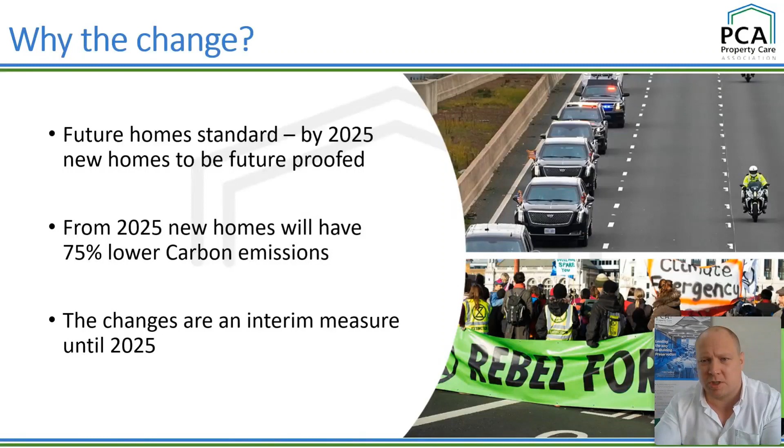So for two reasons, as I see it. One, if we were just going to go straight to 75% lower carbon emissions, it would come as a massive shock. So we need a bit of a transition period there. But equally, we can't just wait and expect people to do it in 3 years. There needs to be this easing in, and this is what we've got now. So that is one of the drivers, and you'll see that when we start looking at the changes, with regards to climate change and the changes to our building stock. So that is one of the drivers for the changes to Approved Document F.

Now, personally, I think there's been a greater reason for the change to ADF, Approved Document F. I last did a webinar a year ago on ventilation, and we looked at a study commissioned by the then Ministry of Housing, Communities and Local Government, now the Department for Levelling Up. They looked at 80 new build properties across a number of sites. And out of those 80, only 3 complied with the building regs, which is shocking. They're the minimum standards. And if we can't get it right in new builds, what hope do we have for existing builds? Now, this was sent to me as a solution for getting around ventilation in an existing build.

So what we've got there is a passive vent install, and just to show, there's the outside as well. This was a ventilation solution that was installed that someone has sent to me. You will notice that they've done that. Obviously, it's a clear bodge, and this is what the problem with ventilation is.

People are getting away with shocking standards. We saw that with the AECOM study, and we're seeing people doing it inappropriately now. They've still got the trickle vent shut, but we'll go into that a bit later. So the problem is Approved Document F unfortunately isn't being followed. That shouldn't happen.

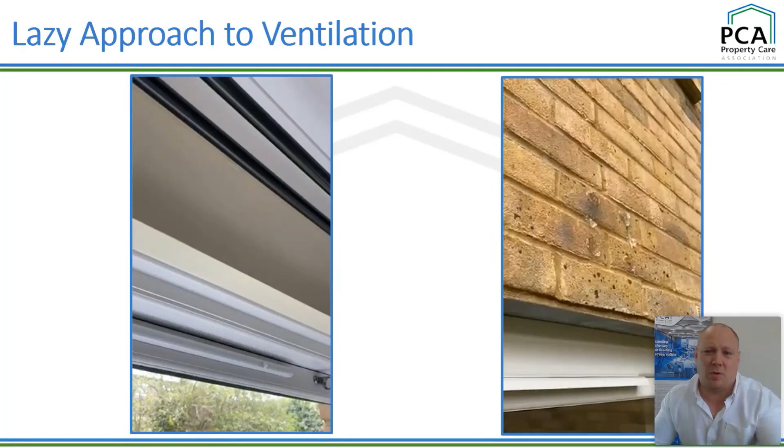Hopefully the tide is turning now when it comes to public perception for the requirement for ventilation. We've got the social landlords bill, which was recently discussed in Parliament, so we're hoping that will make a change. Pre-lockdown, we had the Fitness for Habitation Act, so hopefully the tide is starting to turn, and that sort of thing is no longer going to be acceptable.

Now, for those that aren't familiar, the Property Care Association set up a Residential Ventilation Group, the RVG, which was to try and cast the spotlight on residential ventilation and improve standards when it comes to ventilation in existing buildings. Now, we have been quite vocal and were very much trying to get a revision to the building regs.

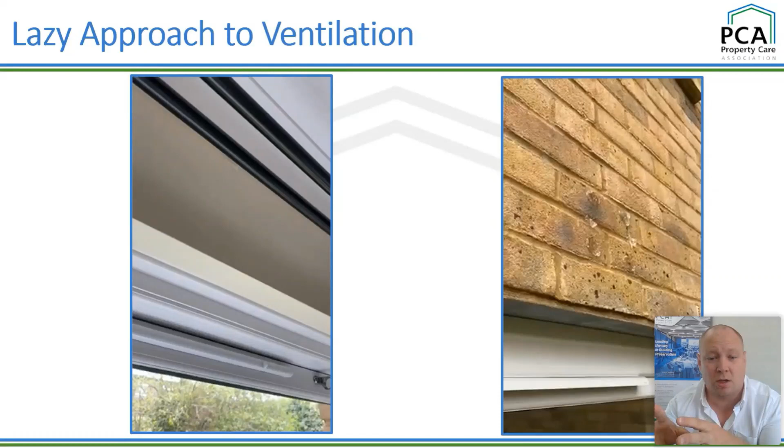What we wanted to see was much like you've got in Part L, where you have an L1A and an L1B. L1A looks at new builds, L1B looks at existing builds. We wanted to see something like that replicated in ventilation. So that was what we were lobbying for. And now there are two documents. However, they're not quite the split that we would have wanted.

So we now have Volume 1 and Volume 2. Approved Document F Volume 1 looks at dwellings. Volume 2 looks at buildings other than dwellings. A caveat, I guess: I am only going to be looking at the English version of the regs.

The Welsh version has recently come out, Paul. I know you're listening, but we're just going to be looking at the English version. The Welsh version has also just been amended. They are very, very similar. There are some slight differences, and actually, to some degree, I think the Welsh regs are clearer. But we will touch on that a bit later.

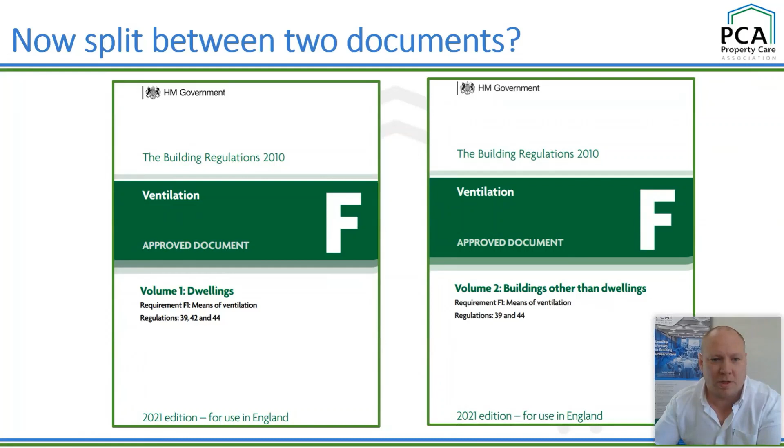So I guess the big question, if we've got two regs and the difference is dwellings and non-dwellings, is what is a dwelling? A dwelling is a self-contained unit designed to accommodate a single household. So essentially a terraced house, a semi-detached house, a typical house, a flat.

What it doesn't include is houses in multiple occupation, so HMOs, where you might share a single kitchen. That would then come into buildings other than dwellings. So halls of residence, hotels, hostels all fall into buildings other than dwellings. If it's designed to accommodate a single household, then it's dwellings. That's what we're going to be looking at today, Volume 1.

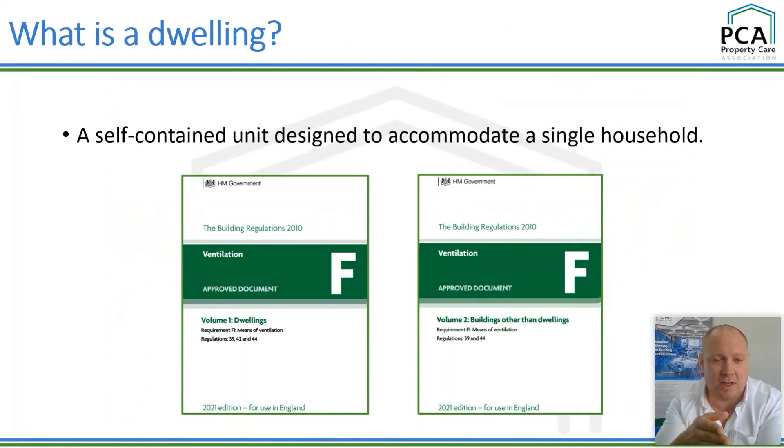The other big change to the document, for those that are familiar with the previous version: we had the Domestic Ventilation Compliance Guide. That has now been scrapped. Well, it hasn't been scrapped, it's been brought into Approved Document F, so it is all in one place. The Domestic Ventilation Compliance Guide was very much around commissioning and provided all the information, commissioning sheets, things like that. Rather than having that as a separate document, it has now been incorporated into ADF.

I personally think that is the right move. Whilst there was a lot of good information in the Domestic Ventilation Compliance Guide, having it as a separate document I always saw as a barrier to compliance, because if you're detaching that information, people are less likely to go find it and less likely to follow it.

So having that in one place is, in my mind, absolutely the right thing to do, provided you get all the information across from the previous version. The other big goal that they were looking to do with this was simplification. Now, if you'd read the old ADF, it was quite impenetrable. It wasn't necessarily easy to read. And I think that was the case for a lot of the building regs, not just ADF.

But ultimately, this is where I always thought that building regs fell down: a lot of them were written and aimed at almost academic level, which is fine, but actually it's the guy on site that needs to understand it, because he's the one that needs to understand what he's doing. They have tried to simplify this document, and as far as readability goes, I think they have done a pretty good job with that.

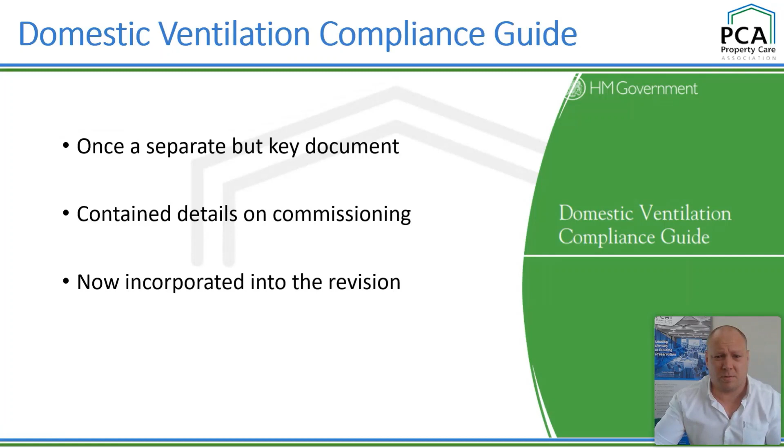So if you look at it, it does flow a lot better. There are some areas which I think are perhaps contradictory or not quite clear and open to a bit of interpretation, and we're going to look through those as we go through this today. But as far as simplification goes, to some degree, I think they get a tick for that. So good on them. So what are the requirements of Approved Document F?

What is the goal? If you were familiar with the old version, essentially these have not changed. There are two requirements. There shall be adequate means of ventilation provided for people in the building, which absolutely there should. Why do you need ventilation? There is obviously humidity. You need to be able to control humidity to prevent build up of moisture, to prevent mold growth, that sort of stuff.

But there's more to it than that. It's there to control VOCs, pollutants, that sort of stuff. We need it to regulate temperature. We need it for fuel burning appliances. We need it to breathe. So ventilation is not solely about moisture. It's probably the bit that we all recognize, but there is much more to it, and it's worth bearing that in mind.

The second part of the requirements of Approved Document F is that fixed systems for mechanical ventilation and any associated controls must be commissioned by testing and adjusting to secure the necessary objectives. So you must provide adequate ventilation, and then you must test and commission to prove that you've got there, which is simple enough. As far as that bit goes, whilst it was broken because it wasn't being followed, I think it is the right thing to have done.

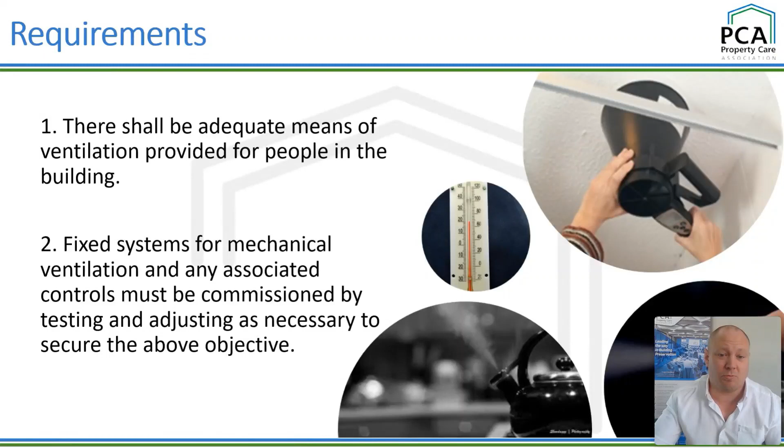So the objectives as far as ADF goes remain the same. But when is it applicable? You do not need to comply with ADF if it is a space where people do not normally go, is used solely for storage, or is a garage. For those that are keen-eyed amongst you, that is the stairwell from 4 Privet Drive, which is Harry Potter's address from the Muggle world, and that is his bedroom under the stairs.

So just for a bit of fun, not a quiz, perhaps in the chat: do you think Harry Potter's bedroom under the stairs would need to comply with building regs? Is it a place where people would normally go? Would it normally be used for storage? In this case, you've obviously got someone living there. So would you need to comply with Approved Document F? Just for fun, people's thoughts in the comments. Would you need to comply as far as ADF goes for his bedroom?

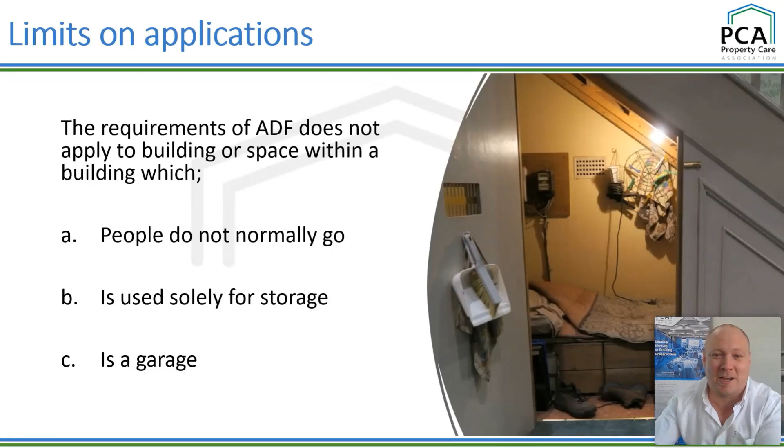So they're the areas where you don't need to comply. And then we have these exemptions, and the exemptions are areas where you may not fully need to comply with the building regs. The exemptions are historic and traditional buildings, emergency repairs, minor works, and live/work units.

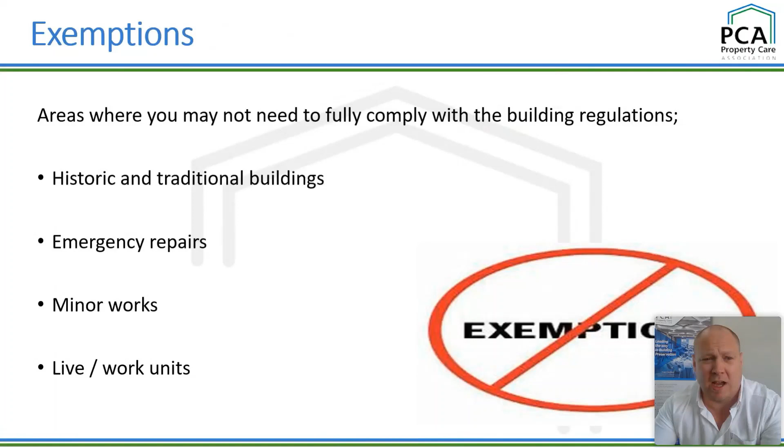I find one of these a bit uncomfortable, and we'll look at that in more detail, which is the historic exemptions and traditional buildings, partly because the term traditional buildings I find bizarre. You know, I live in a 1970s house, built as you'd expect, cavity walls, tiled roof. It's as traditional a build as you could possibly get. So traditional, I think, is far too wide a sweeping term.

But the historic exemptions, it goes on and provides a bit more detail. Historic buildings with a vapor permeable construction that both absorbs moisture and allows moisture to evaporate. And it gives you some examples, including wattle and daub, cob, stone, and constructions using lime render and mortar. You've got to bear in mind, probably the vast majority of the something like 8 million solid wall homes in the UK are probably built using a lime render. And arguably, these are some of the properties that might have the poorest provision for ventilation. So to my mind, it's a bit of a loophole.

And equally, we've already established that ventilation isn't just about control of moisture. It's about so much more. It's about the control of pollutants. It's about control of temperature. And you're not going to get that. So the indoor air quality in these buildings, that ultimately are probably going to be the ones that need bringing up the most if we're going to hit our carbon neutral goal, are probably going to be the ones that suffer the most, because there's this little loophole. You don't need to fully comply.

What does that mean? And it does say as far as reasonably practicable, and that's where they think that they've sort of covered themselves. But to my mind, I think it's a little bit of a loophole. I don't think that a bit of lime render really is a substitute for proper ventilation in my mind.

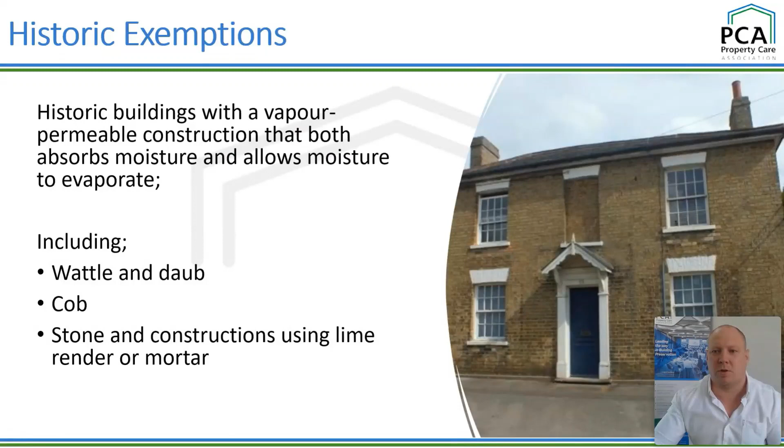Existing buildings. So this is where our biggest area of concern with the previous version lay. It wasn't particularly clear when you needed to comply with the building regs with existing buildings, and this has been very much addressed in this version of the building regs. So another big tick, actually.

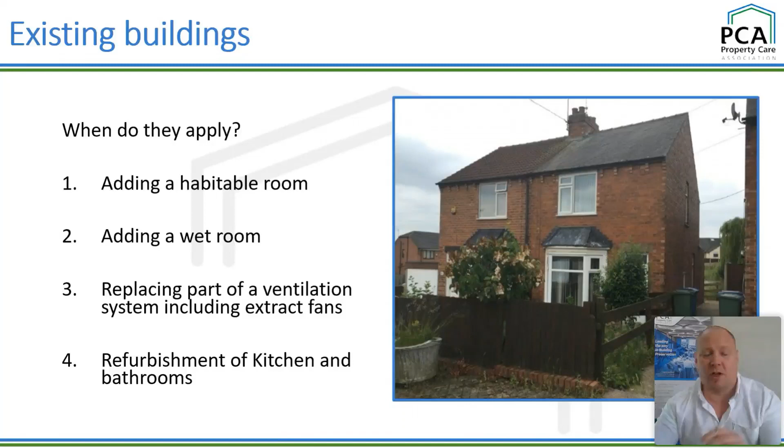When do they apply? They apply when adding a habitable room, when adding a wet room, replacing part of a ventilation system, including extract fans. So if you're replacing a fan, you then need to comply with the building regs, even if it's just part. So any part of the ventilation system, you need to comply. Refurbishment of kitchens and bathrooms. So if you're doing those, then you need to comply with the building regs.

You also need to comply when undertaking works that may impact the ventilation within that building. And then it gives two examples for that: either replacing windows and doors or doing energy efficiency works. As I mentioned in, I think, the second slide, there are going to be huge wholesale changes coming to the building stock if we are going to get to our carbon neutral goals.

So there is going to be a huge amount of retrofit insulation happening to our existing buildings. And a large part of this document is about anticipating those changes. So what it says is that ventilation should either meet Approved Document F when you're doing these works, or it should not be made worse. And how do you establish whether you are going to meet that or you're not making it worse? Well, they provide you a little table.

Mr. Dawson, if you're listening, that's one of your pictures. Thank you very much. You know, the disasters of retrofit, particularly external wall.

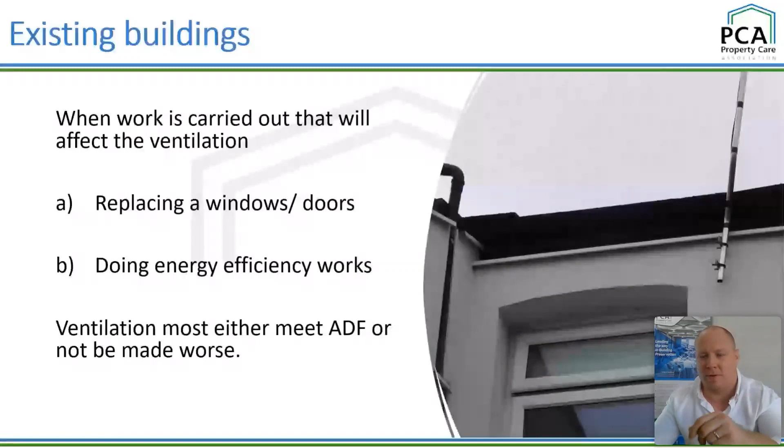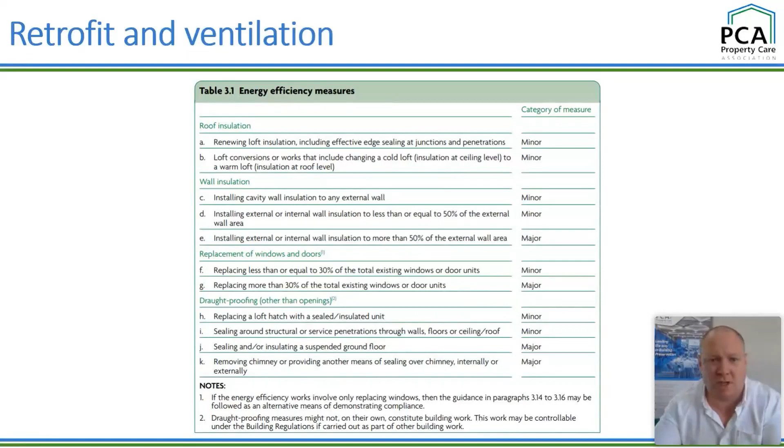So they give you this table, and essentially it's much like a driving test, where you get a list of minors and a list of majors. For instance, renewing loft insulation is a minor. Replacing less than 30% of your doors and windows, a minor. Replacing more than 30%, a major. And then you get the next table.

So essentially what you're allowed is 2 minors. Anything more than 2 minors, then you need to be considering ventilation. 1 major, and you need to consider your ventilation. Much like your driving test, if it is still like it was when I did mine all those many moons ago, 1 major is a fail, but you're allowed several minors. But in this case, you're only allowed 2.

So essentially category A is your 2 minors. Then we have category B, and then we have category C. Category B is reduced and the other one is significantly reduced ventilation. But the only difference is that for category C, you would need to have a specialist design a natural ventilation system, which leads us on nicely.

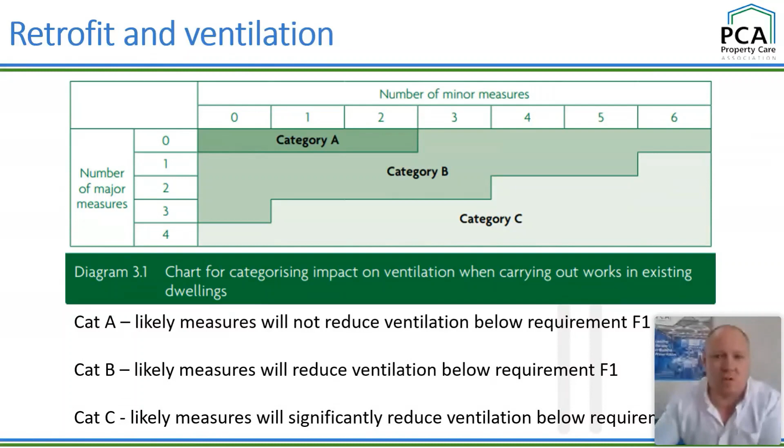So what is a natural ventilation system? For those that are familiar with the previous regs, we had 4 ventilation strategies put in there, and they were given a numerical numbering.

Of course, numerical numbering, that's what numeracy is. But what do you think to that for a pun? You know, I think I've missed a vocation. 1, 2, 3, 4, no more. That's groan-worthy, isn't it? But there we are.

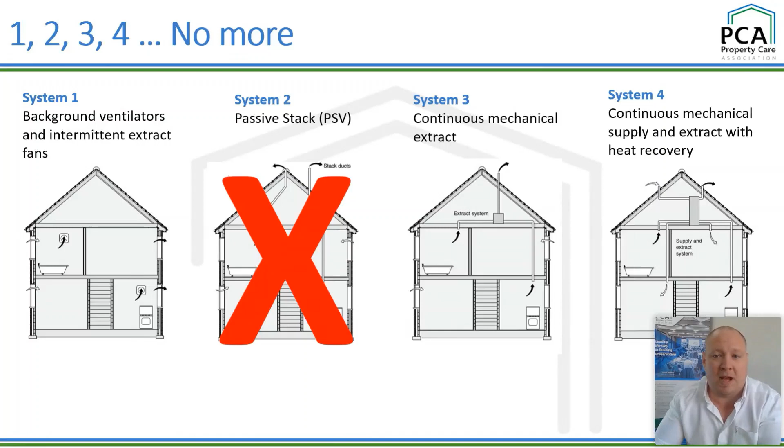So we had system 1, background ventilators and intermittent extractor fans. System 2, passive stack ventilation. System 3, continuous running fans. And then system 4 was your MVHRs. Now, we have done away with the numbering and we have done away with passive stack. So we now have different titles as well. System 1 is now natural ventilation with intermittent extractor fans.

We've done away with passive stack because it was only installed in less than 1% of new builds. I'll be brutally honest, I never encountered it during my time contracting. I never saw it in existing buildings. I haven't seen it even during my tenure at the PCA. So it's not all that common. It's now not referenced in the approved document. And we've got continuous running fans and the MVHR.

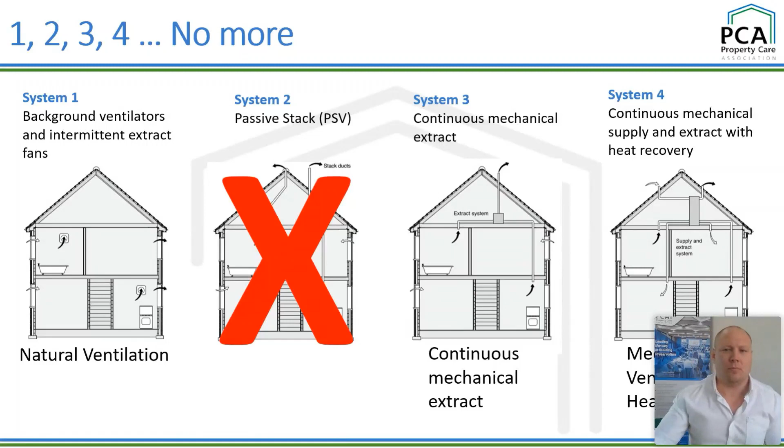The 3 strategies that are now listed all follow the same principles: extraction from wet rooms, a supply of whole dwelling ventilation, and that's got to be supplemented with purge ventilation to remove high concentrations. Purge ventilation is essentially your ability to shift huge volumes of air very quickly, principally opening up your window. So all of the strategies in approved document F now follow those 3 principles.

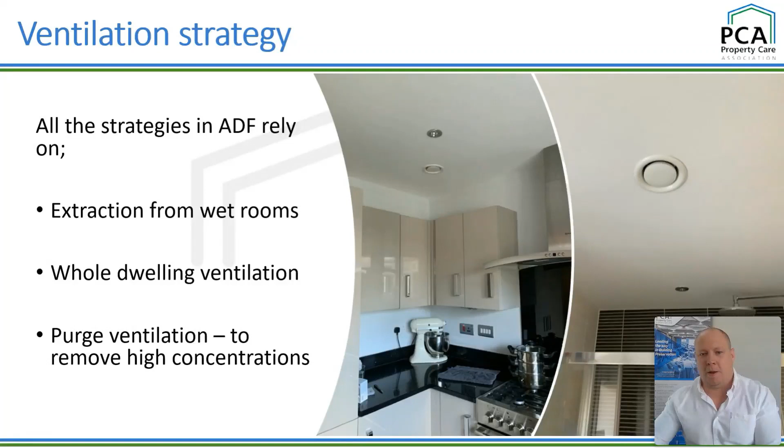Let's quickly look at those 3 strategies in a bit more detail, or how they might have changed slightly. So intermittent fans or natural ventilation, it now states it's only suitable for less airtight properties. Why is that the case? These are your typical fans that you probably come across on a daily basis, but they only work when they're told to work: when the operator pulls the cord, or they've got some element of humidity tracking, or something tells it to operate.

So the vast majority of the time, they're almost a version of purge ventilation, because they're only doing the job when there's high humidity. So you need a provision of background ventilation to supplement that, so you've got fresh air for the remainder of the time. That is why these systems are dependent on background ventilation, and why they're only suitable for less airtight properties. I'll happily hold my hands up and admit I'm perhaps a little naive on this, but my understanding is that any existing building, unless it's converted to a passive house, would be considered a less airtight property.

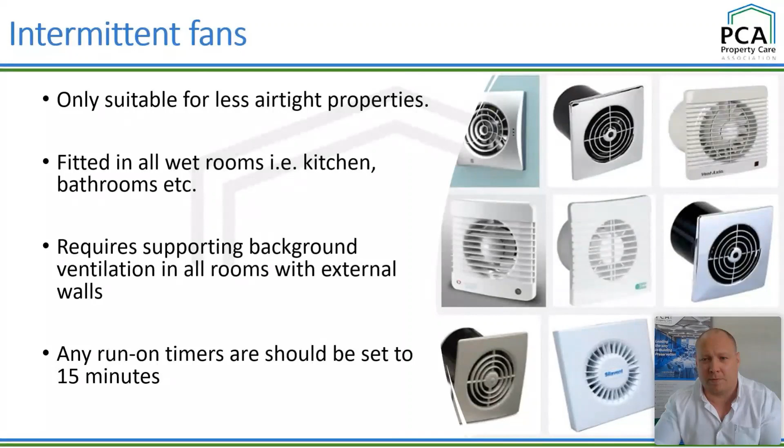Intermittent fan. So we still have our flow rates as before, and these haven't changed. So kitchen, you've got a couple of options: 30 if it's a hood extracted to outside. If it's a separate fan, you need to be 60 litres a second. Utility rooms 30, bathroom 15, sanitary accommodation 6, or if it's sanitary, you can follow the guidance for purge ventilation. But that hasn't changed. That is the same as the old document.

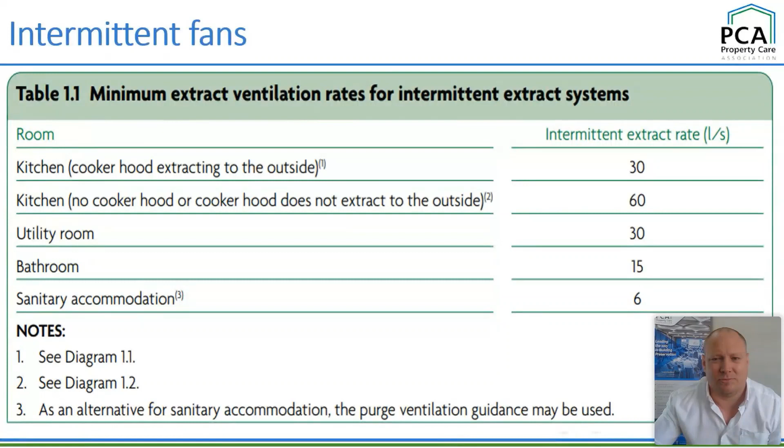I struggle a little bit with this because I always think, why is a utility more than a bathroom? In my experience, the bathroom is going to produce more moisture. I assume they're making the assumption that everyone dries their clothes in the utility. I find that a little odd. It's just a thing.

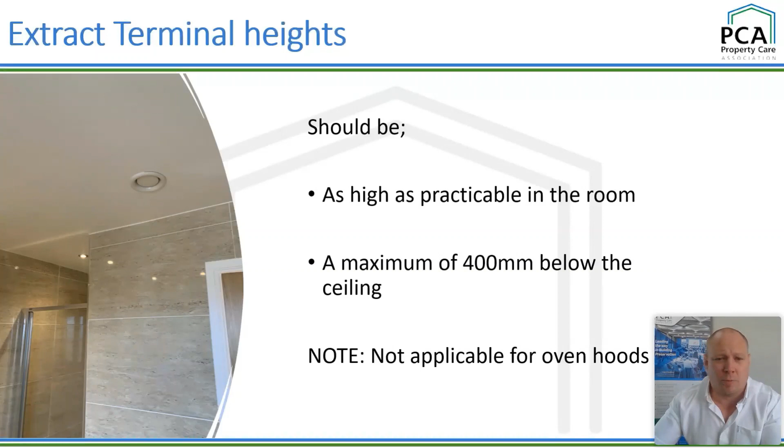Extract terminal height. So where should the extractor fan be placed? It should be as high as practicable in the room, and a maximum of 400 below the height of the ceiling. Good guidance, simple guidance. That's what we like about the changes to the new building regs. Note, it's not applicable for oven hoods.

Oven hoods, it simply says you should follow the manufacturer's guidance, or you should be between 650 mil or 750 mil above the hob. The flow rates you need, if you are using an oven hood as part of your ventilation strategy, if it's actually going to outside, so ducting externally, then it could be 30 litres a second. If it's independent of your oven hood, then you need 60 litres a second.

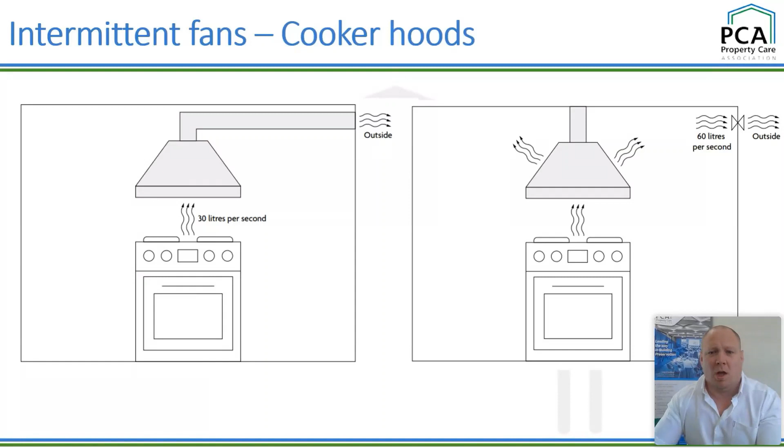To my mind, in the previous domestic ventilation compliance guide, we had a really good schematic about flexible ducting. Flexible ducting is the devil's work. It's what BSRIA say is responsible for most ventilation failures. Surely that would have been a better diagram to leave in, that had greater value than something that doesn't really explain a very difficult concept at all. Little rant over, there we are.

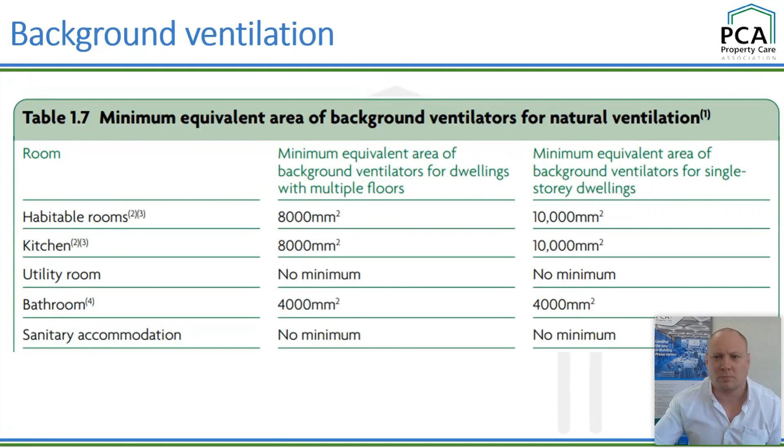As I say, you do need to have supporting background ventilation. They need to be in each of your habitable rooms. It will vary depending on whether you've got a bungalow or a two-storey building. But there are your rates. So 8,000 for rooms with 2 storeys, except for your bathroom 4,000, but 10,000 on habitable rooms and kitchens in a bungalow. So we've covered that very quickly.

Continuous running. We'll quickly go over this, but it can be either centralized or decentralized, the same as before. You don't need as much background ventilation. You only need sort of 4,000 per habitable room, but no background vents in wet rooms for obvious reasons, because if you've got a continuous running fan and a trickle vent in a wet room, you're just going to create a short circuit, and the ventilation isn't going to be doing what it's meant to be doing.

The other thing that is quite neatly pointed out in this document, and it was actually included in the last one, but again, merit to this version because it is clearer, is where you're discharging a continuous running system to, and even a natural ventilation system. If you've got something that's doing a relatively low volume, it's not necessarily going to have that much force behind it. If it's going into a prevailing wind, then ultimately the ventilation system might be compromised for a large proportion of the time. So even when you're doing your surveys, if you know you've got continuous running, check where it's discharging to, because that may impede the system quite significantly.

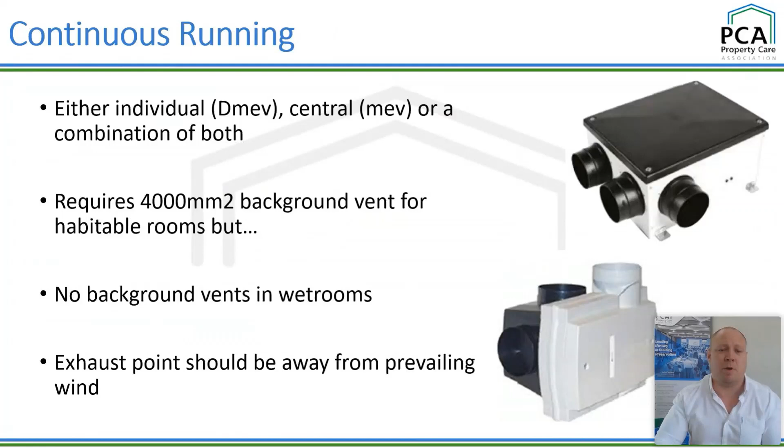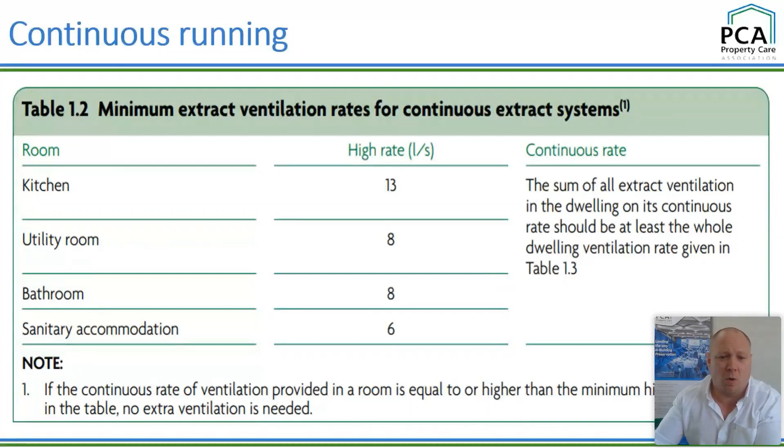There is another caveat to that. They must also achieve a minimum of 0.3 litres per metre squared of the internal floor area of the building. So you need to do that calculation, and whichever one is the highest, you must follow that. For those that are familiar with the previous version of the document, that has jumped quite significantly. Previously we were at 13 rather than 19, 17 rather than 25, 21 rather than 31, 25 to 37, and 29 to 43. So quite a big jump there.

Now, I know some of you have expressed this too. We've discussed it at the RVG as well, for those that have attended those. I don't think ventilation rates have ever been the problem. And we know from previous studies, like the one done by AECOM that we mentioned in the beginning, we weren't getting the flow rates we were meant to be getting. So upping the flow rates, in my mind, was never really where we were going wrong; we weren't even getting to where we should have been in the first place.

So moving them up is probably counterproductive, because if you look at what we're trying to achieve, particularly when we start talking about the carbon efficiency measures, if we're changing the air to the volumes detailed in this, then ultimately that is going to counteract any of the energy efficiency measures, because once you've heated that air, you're getting rid of it a lot quicker. So you're going to be offsetting any gains you've got from retrofit measures, and your heating bills are going to go up because you're having to heat fresher air.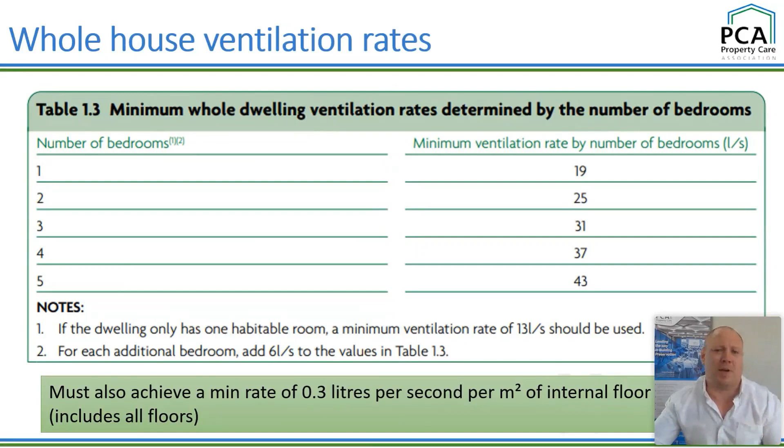So to me, I'm not necessarily sure that was the prudent move. We should have tried to ensure that we were getting to the rates we were getting to before, rather than moving the goalpost further away. Watch this space. We'll be providing some more stuff on that very soon.

MVHR. So I won't go on this for too long. You don't see it very often in retrofit. Very difficult to retrofit unless perhaps you've got a bungalow, but some guidance. Each habitable room requires a supply of fresh air. Terminals should be placed to avoid drafts. We've seen it on some of the properties that we've looked at, where you'll have the input directly above the bed. What's worse, in the units we've seen, the unit was massively underpowered as well.

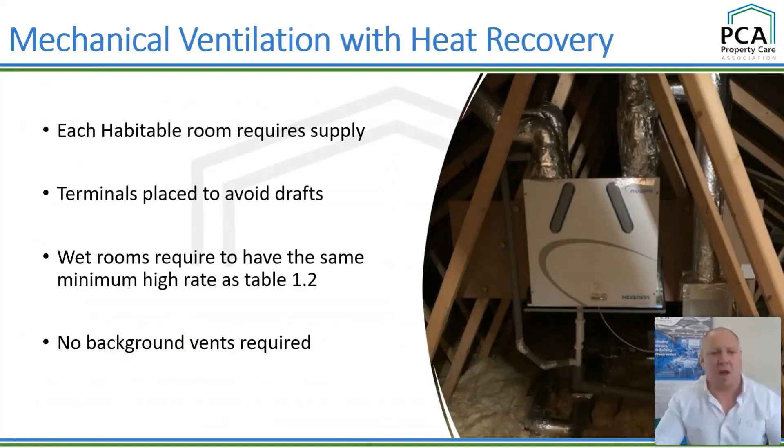So to try and get up to the flow rates that they needed, they were having to ramp it up, making it noisy, and the rates going through were just ridiculous. So it was never going to work, and that's going to be counterintuitive, because people aren't going to use the systems if they're not sleeping, lying there in bed with this jet coming down; it ain't going to work. So for wet rooms, you're required to have the same minimum high rates as what we saw for the continuous running fans. With this, you need no background vents at all.

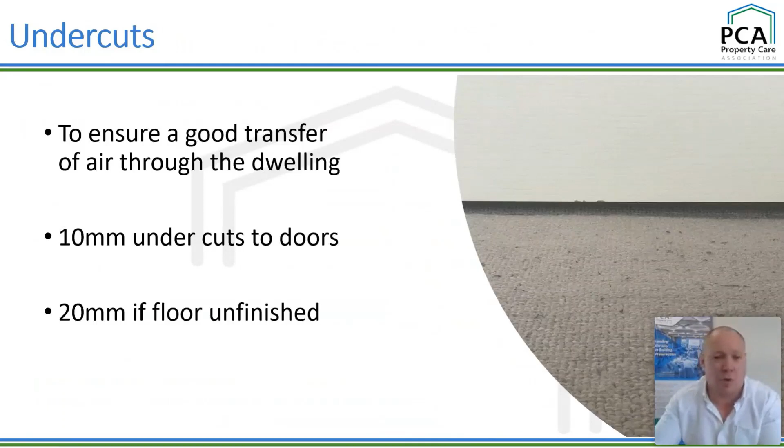Undercuts to doors. Now, this hasn't changed. This is the same as what was in the building regs, but I wanted to bring it up because I believe it's very important and very often overlooked. You need undercuts to doors to ensure that there is good transfer of air throughout the dwelling. That needs to be 10 mil above finished floors, or 20 mil above unfinished floors.

Anecdotally, how often have you gone into properties and the bedroom with the mold growth in is the one where you're actually dragging the door along the carpet? And I think it actually makes a huge difference. I struggle to quantify that, and like I say, it's a bit anecdotal, but if you think about it, how many times have you seen that? So undercuts to doors, I think, make a huge difference.

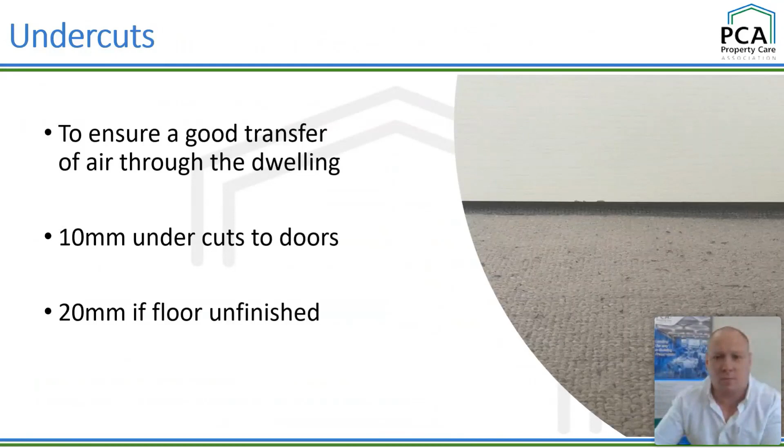One of the other big changes to this document, and I know one of the reasons that people wanted to see change to this document, was more holistically to indoor air quality. So there is, like I say, more than just the moisture aspect to it, and there's no point replacing indoor air with bad quality outdoor air.

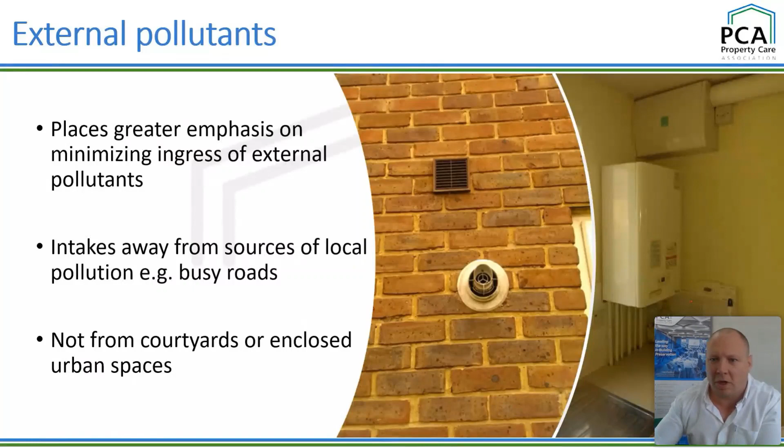Purge ventilation, I mentioned this is obviously part of the key strategies, so apologies, still got a lot to get through, and I told you I'm probably going to make Andy a little bit nervous now, but there we are.

So purge ventilation is required in each habitable room. It must be capable of doing 4 air changes an hour. It can be either through mechanical means or manual means, which is essentially opening a window. But you must take into consideration outside noise as well. So if it's onto a main busy road, you would need to take that into consideration. But purge ventilation is equally part of the ventilation strategy in Approved Document F and shouldn't be overlooked. It's just as important as the fans and everything else.

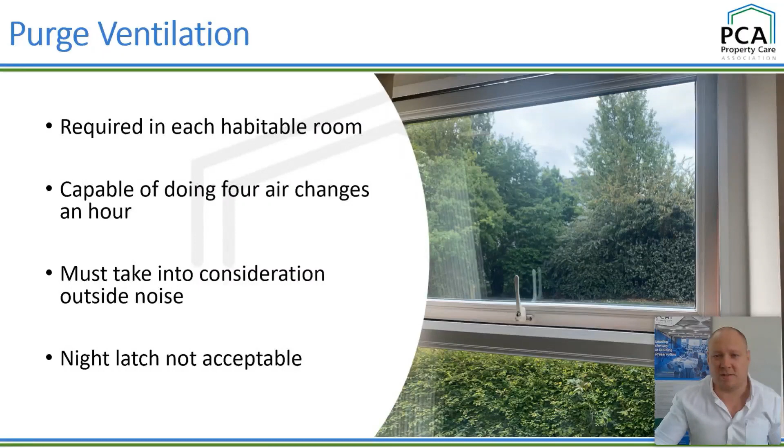Ducting. Ducting, as I say, is one of the big reasons why ventilation fails. The guidance that was set out in the domestic ventilation compliance guide previously is pretty much replicated in this in text rather than through the diagram. It should be pulled taut. Stay away from flexible ducting. It's not good stuff. If you are to use it, pull it taut, less than 1.5 meters.

The one thing that is strangely absent from this version of the document, though, is that in the previous versions, and I think probably in the domestic ventilation compliance guide, it said if you are running ducting through an unheated void, it should be insulated. We've not got that now. Any mention of that seems to have been removed.

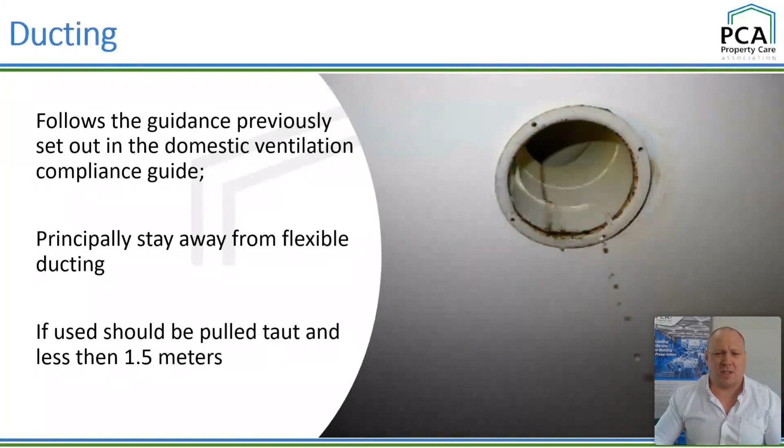So what happens when you've got warm, moist air climbing up through an uninsulated, unheated void is you've got a risk of condensation. If it condenses in that ducting, it's going to run down, and you're going to end up with something like we've got in that picture there. So again, it seems a strange omission. Common sense would say to do it. Don't know why it's missed. Probably an oversight.

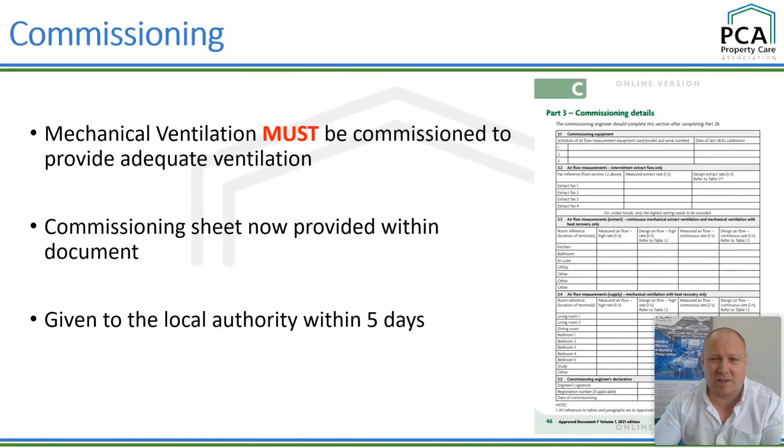Commissioning. So ventilation systems must be commissioned. As I say, the document has been taken out of the domestic ventilation compliance guide and pulled into the back of Approved Document F, and there it is on the right hand side of your screen. And it says the commissioning should be provided within 5 days to the local authority as well. It contains all the information you'd expect: who did the testing, what equipment they used, what were the design flow rates, what flow rates were achieved, what ventilation system, the usual stuff.

Flow rate testing is probably where we might get a little contentious. Flow rates for all mechanical fans should be tested, including intermittent fans, cooker hoods, continuous supply and extract fans. And they should be tested in the same way, using an anemometer, much like the one you've got there. So it can be a powered hood, or your typical Testo type models. Other brands are available. But it must be calibrated by someone UKAS accredited, and it must have an accuracy of plus or minus 5%. And when you're doing it, you must shut all your doors and windows internally as well.

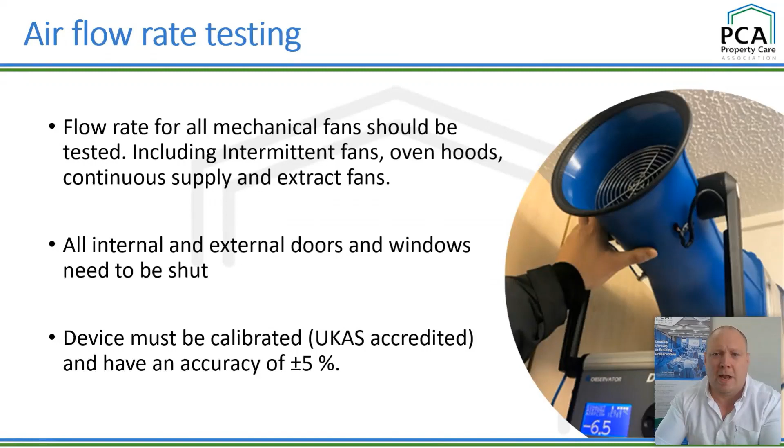Now, I've had discussions with some people that say they interpret the new version to say that you do not need to do flow rate testing for existing builds. And they base that on this here. So in section 4, which is the commissioning section, it says airflow rate testing and commissioning for airflow rates for mechanical ventilation in new dwellings must be measured. So it's the fact that it solely references new builds there that they have interpreted that you don't need to do airflow rate testing for existing buildings.

Now, I dispute that. I come at it from a different way, and the reason I come at it from a different stance is, one, the requirements tell us that we need to. So if you think back to requirements, it says we must provide adequate ventilation, then you must commission by testing to prove that you've achieved that objective. So even in the requirement, it says we must test.

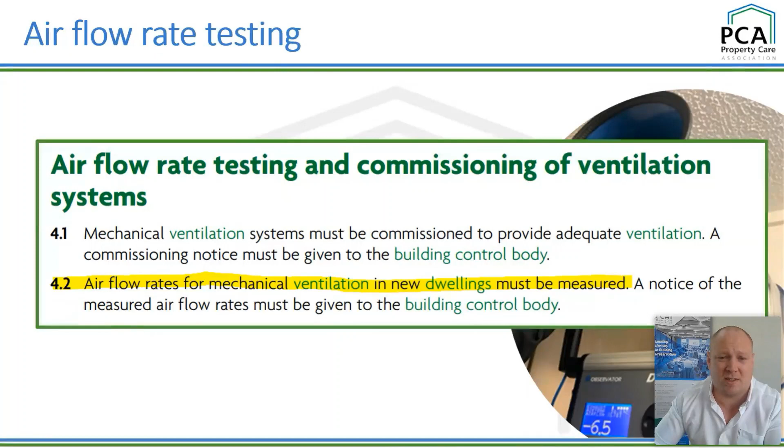And this is the other section, which is the intention, which essentially says in the Secretary of State's view, you will comply in new and existing dwellings if you follow the guidance in paragraph 4.1 to 4.12 to achieve all of the following. But if you look at what 4.1 to 4.12 are, 4.9 is the section on flow rate testing, and the first thing it says is flow rate testing should happen on all mechanical ventilation. It doesn't say only on new builds or anything like that. And in this bit here, it says for existing dwellings.

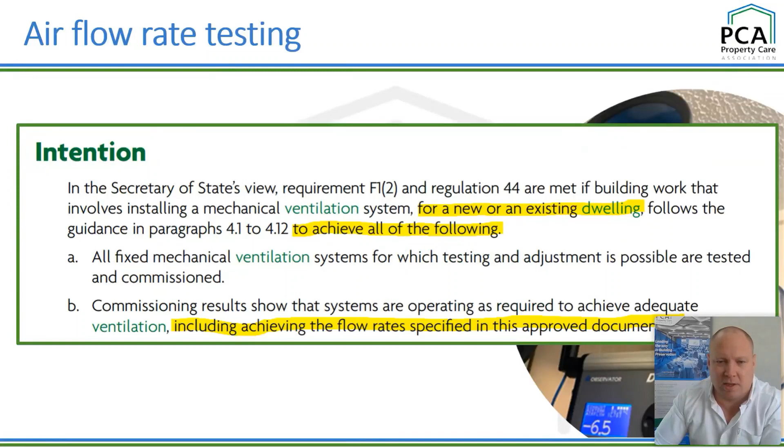And then if you look at section B, commissioning results that show systems are operating as required to achieve adequate ventilation, including achieving the flow rate specified in this document. So to my mind, I think it is very, very clear that you need to do flow rate testing on existing buildings. Apologies for the terribly unstraight lines there, but I think it highlights the text you need. That last bit, 4.2, is a carbon copy from the last regs, and I personally think it's a bit of an oversight, but I think it's clear what the intentions are. You should be doing flow rate testing on existing builds.

Long-term success, another quick but perhaps short rant. Once you commission a system, that's all very good and well, but for the long-term success of a ventilation system, it needs to work for the foreseeable future. It can't just work on the day you commission it. It's got to continue to work. How do you ensure that? Maintenance. So what the regs now say is that you need to provide information to the owner about the ventilation system and its maintenance, and you must provide that in a clear, non-technical way.

What you've got there is a filter taken from the MVHR system that we showed you earlier. Clearly had never been maintained. It was 6 or 7 years old. The owner hadn't been provided any information as to how to maintain it. They were never going to maintain it. And that's vital, and another point of how important it is to have understanding of ventilation systems.

So let's say we've established how difficult it is now to hit those whole house ventilation dwelling rates. Is that arguably going to tip the balance back to intermittent fans? And if we're doing that, there's a dependence on trickle vents. Now, let's be honest. How often do you see trickle vents left open? How often do the owners know what they're doing to use them? And that's why I think this bit is so very important. You need to be able to provide the relevant information to the owner. It must be done in a clear, non-technical way. Otherwise, actually, we're in for a world of pain.

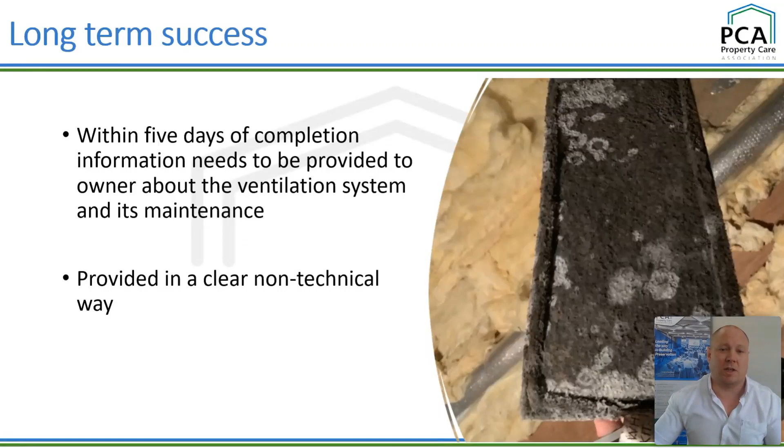Right, missed opportunities. PIV is a bit Marmite, I think. There are those that absolutely love it, and there are those that don't love it so much, is probably the fair way of putting it. I genuinely believe it is a very useful tool to have in your arsenal in certain situations to control condensation in buildings. And there's some that will say that it's actually been entirely taken out of Approved Document F.

I would disagree with that. Actually, if you look at the document, whilst there was only a fleeting reference to PIV in the previous version, this one actually says that other systems are applicable if it can be proved that it's acceptable. So I don't think it's dismissed them entirely.

But actually, there's been over 1 million PIVs put into existing homes. It is probably one of the most commonly utilised means of ventilation in existing buildings. So why was this overlooked in the building regs? Surely this would have been an opportunity to try and establish some best practice, ensure that when it is put in right, it's done on a universally accepted standard, much like the PIV PCA guidance that we've written. So to me, that is perhaps a missed opportunity, and maybe it doesn't neatly fit into the principles, the strategies that they put forward.

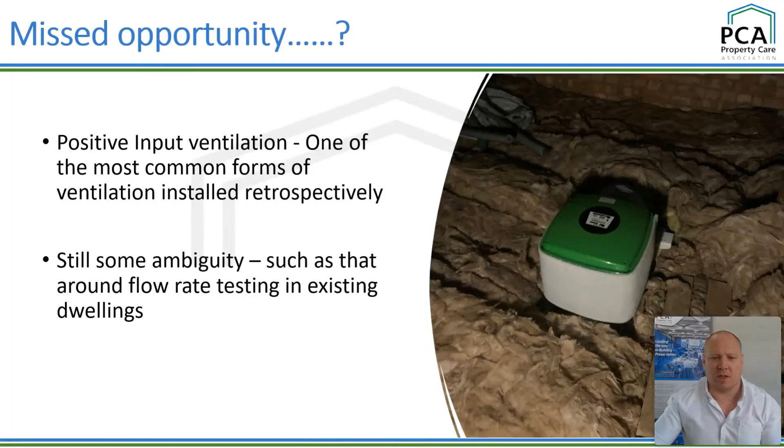So in section 3.3, which is the existing building section, it talks about when it becomes applicable. So for works done to improve the ventilation of the dwelling that's not triggered by the building works in section A to G. Now, A to G is that section that I alluded to earlier: addition of wet rooms, addition of habitable rooms, retrofits, windows, doors, that sort of stuff. So it's basically, if you were going to put an extractor fan in because they had a condensation problem and they wanted to control ventilation in the bathroom, it says basically section 1 should be followed. So if you're just putting an extract fan in to improve the ventilation, then follow section 1.

Normally, I would say that is great guidance because we want people to follow the building regs. Where I'm very conflicted on this is when you actually start boiling down to it. So to follow section 1, you then need to start looking at the provision for background ventilation. You'd need to start looking at, have they got ventilation in all of the other rooms, kitchens, bathrooms, utilities and all that. Are those fans, if they are there, doing the flow rates expected? So you now need to start doing this whole broader check.

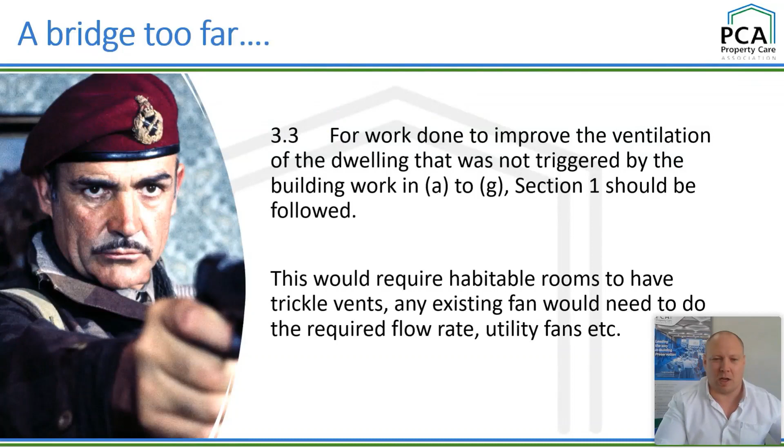So my concern is, if no one is able to get to full compliance because they've set the parameters so far, why don't we have something like on historic buildings where it's as far as reasonably practicable, and where we are encouraging people to take those steps to get there, rather than saying you must follow all of that guidance? Because ultimately if they know they aren't going to get anywhere near it, they're unlikely to follow it.

Andy, my last slide, so please don't fret anymore.

And unfortunately, another one, my interpretation of things. The other strange omission with this revision to the ADF is that any reference to competent persons seems to have been removed. In the other ones, it was quite clear you could notify building control in advance of the install, or you could get it done by a competent person. There is no reference to a competent person in this version of building regs, which concerns me, because we go back to the AECOM study and all that information that we were looking at the start. People aren't doing it right anyway.

So actually, if we're encouraging the work to be done by people that don't understand ventilation, then the chances are we're going to end up even wider of the mark. And there has never been a time for it to be done correctly, and that time has never been more important as it is now, particularly with things like, as I mentioned, the social housing regulation bill coming in.

Now, I've had this conversation with people and they've sort of said, well, there is a reference to competent persons within the manual for the building regs. For anyone that's not familiar with the manual, that's an overarching document that tells you how to use the approved documents.

Now, there is a reference that says you can use a competent person for a mechanical ventilation system, but with the best will in the world, people will be looking at ADF in isolation and not necessarily with the building regs. So I think that's a bit concerning, and all credit to the Welsh version of building regs, because that is actually much clearer and it says, get a competent person to do it. So that's where I think there's a bit of strength to their one.

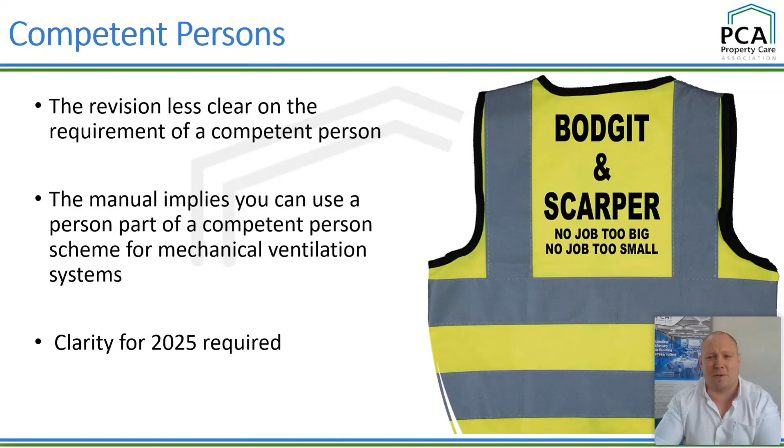So Andy, there you are, done. Oh, well, fabby stuff. You caught me by surprise there. I wasn't ready with the trigger there, but fabby presentation. James, I do have a question straight off the back though, and it's simply because of the answers that were coming in via the chat.

Harry Potter's cupboard. So the space, does it comply with building regs? Yes or no? Should it comply? My answer would probably be, if you've got a child sleeping under the stairs, you've probably got bigger issues than the building regs. But ultimately, if you've got someone living under there, then yeah, you probably should, because someone is going there regularly. But yes, I have to say the fake ventilation things I had a good wee chuckle with. I can't believe people would do stuff like that just to simply circumvent regulations.

It's just madness. Actually, it probably brings me to a very good point, and the first question, which is actually my question. Now, you alluded earlier on that to a certain degree, and these are my words, people were almost ignoring the building regulations for Approved Document F. If they were ignoring them beforehand, why are they going to comply with the regulations now that they've been revised? What is it that's going to drive them, incentivize them?